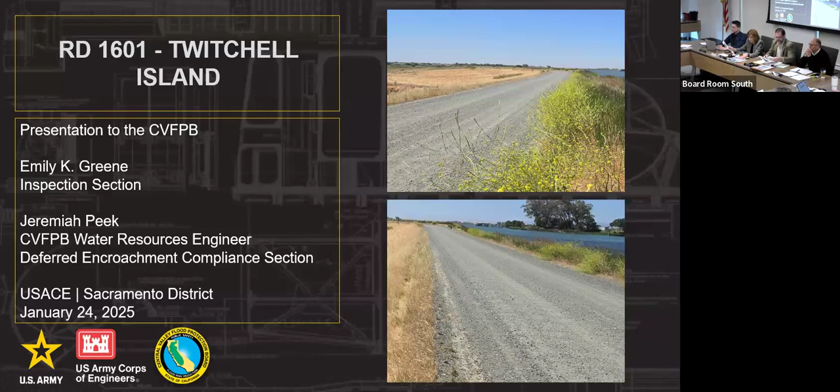Oh, that was the wrong presentation. We're actually going to brief item 8A first, then move on to item 8B. Item 8A on my agenda is the Butte Creek... the Mud Creek levee. That's correct. Did I say that incorrectly? No, it was just the presentation behind you, it was the wrong one. So, oh, I was correct. The slide was off. Thank you. All right, so we'll get started again.

Good morning, everyone. My name is Zubair Dosu, manager of the Deferred Encroachment Compliance section, and today I'm here to help brief one of the inspections we have today, which is the Chico Mud Creek levee system. That will be presented by Emily Greene, Chief of the Corps Inspection Section, Acting Chief of the Corps Inspection Section, and myself. Following this presentation will be item 8B, a presentation on the inspection report for Twitchell Island.

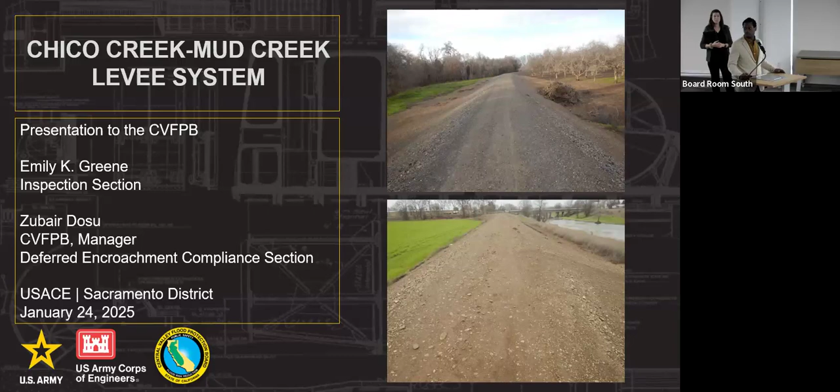That will be presented by Jeremiah Peek from my team and Emily from the Corps as well. We do have LMA representatives and district engineers in attendance with us today. For the Chico Mud Creek levee system, we have Kim Hunter, Deputy Director of the Land Development and the designated floodplain administrator for Butte County Public Works. Her attendance is virtual. In the audience today, we have Elizabeth Ramos, Senior Engineer for KSN, the district engineers for the Chico Mud Creek levee system. They are both welcome to answer questions and give comments as well.

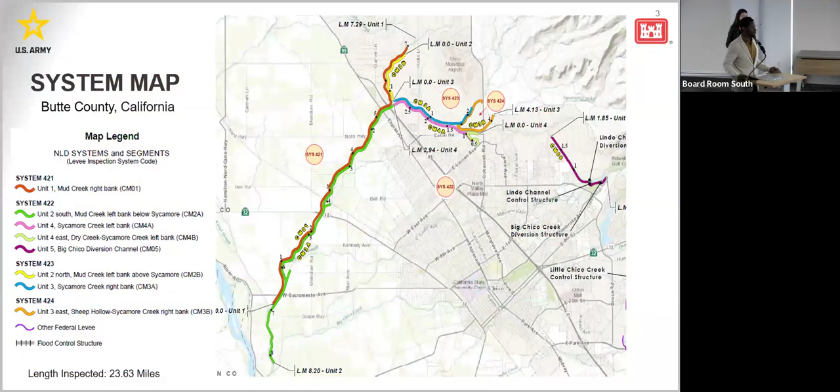Here we have a vicinity map of the Chico Mud Creek levee system. It is located in Butte County, approximately 85 miles northwest of Sacramento. The levee system provides protection for the city of Chico, and it is maintained by Butte County Public Works. Next, I will hand the presentation over to Emily, who will take you in for a closer look at the 4 levee systems and their 8 segments.

Good morning, Ms. Greene. Good morning. Thank you, Zubair, for that introduction. President Dolan, members of the board, happy to be back to talk about the results of our most recent inspections. To elaborate on these systems, from what Zubair showed on the previous slide, there are 4 systems that make up the levees that surround Chico. These are part of the Sacramento River Major and Minor Tributaries Project. The 4 systems are comprised of 8 segments, as defined by this map on the screen, and hold back floodwaters from Big Chico Creek, Sandy Gulch, Sycamore Creek, and Mud Creek. The systems reduce flood risk to the city of Chico and its suburban areas and some agricultural lands.

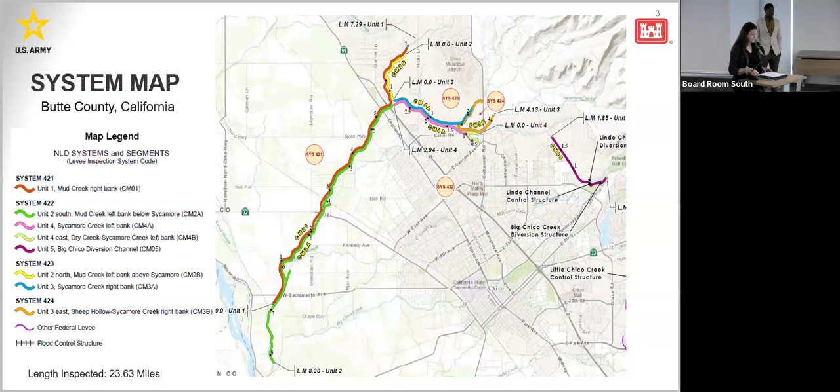Next I'll be showing the system report cards. Again, there are 4 systems, so I'm going to show 4 report cards. The first one here is Unit 3 East system. Overall, this system was determined to be in good condition. There were 0 categories rated unacceptable, meaning no deficiencies were observed that we expect to have a negative impact on project performance. The lowest rated category assigned was minimally acceptable. Based on the inspection results, the system is active in the PL 84-99 rehabilitation program.

Next report card, this is for Unit 1. Two categories were rated unacceptable in this system, including encroachments and animal control. The unacceptable rating means deficiencies were observed in these categories that are expected to have a negative impact on project performance. Based on the inspection results, the system is inactive in the rehabilitation program.

Third report card, this is for the Units 2 North and 3 system. On this system, one category was rated unacceptable, and that was for encroachments. Oh, I'm sorry, I see I wrote just one in my notes, but I see on the report card there's actually two - there's also a U item for depressions and rutting in this system as well. Based on the results of this inspection, the system is also inactive in the program.

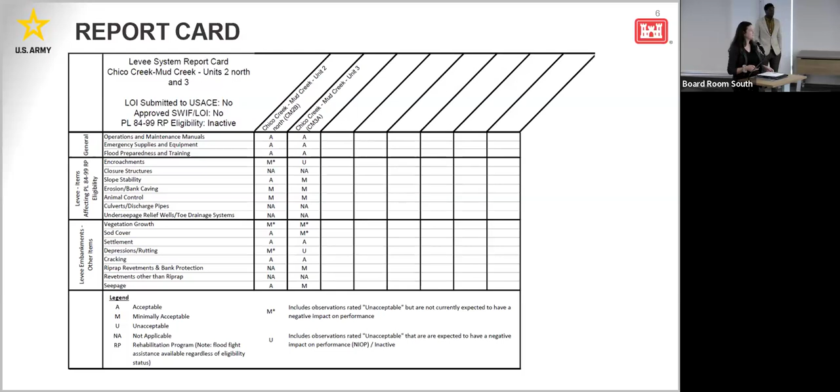Finally, we have the report card for the Units 2 South, 4, and 5 system. This is the largest of the 4 that protects the city of Chico. This system had 5 categories rated unacceptable, including encroachments, erosion bank caving, animal control, settlement, and depressions and rutting. This system is also inactive in the rehab program based on the inspection results.

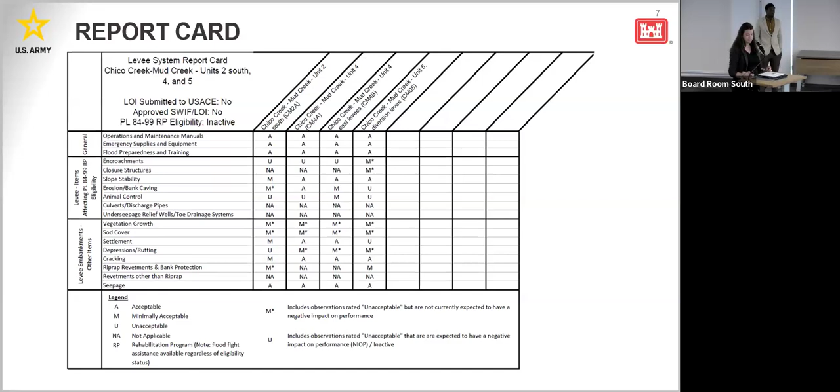So next I'll show a few example observations. I just have one slide and not four, one for each system, because the bulk of the unacceptable deficiencies were related to encroachments and animal control. I feel like this slide really does a good job demonstrating the overall typical conditions of all four systems.

So all of these specific observations were assigned the highest unacceptable rating and are expected to have a negative impact on project performance.

Photo number 1, we're looking at animal burrows on the levee slope with holes measuring about 5 inches in diameter. Burrows were observed on both slopes in this particular area, and this condition was observed to extend for approximately 2 miles.

Photo 2 shows the outlet of a 24-inch culvert that crosses the levee 15 feet below the crown. Some maintenance issues identified included cracking and displacement of the surrounding riprap protection, and sediment was observed partially inhibiting function of that flap gate. Although the largest concern was the results of the video inspection.

A video inspection performed in 2018 resulted in a likelihood of failure rating of 5, which is associated with the highest level of risk.

Photo number 3. This one doesn't look scary, although it is highlighting a potentially very serious concern. There were several areas throughout multiple systems where the levee was measured to be smaller than the as-built indicated they were designed to be. This photo is showing a crown width of 8 feet, whereas the as-built showed the levee was constructed to be about 12 feet.

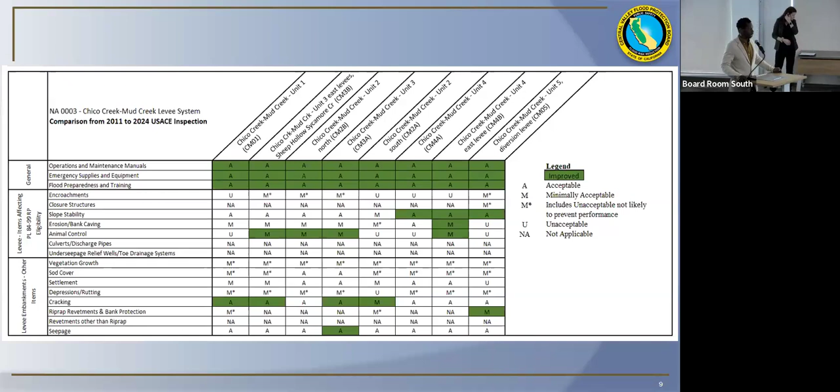The other 3 levee systems are currently inactive, but I am told there is a draft LOI in the works. That draft LOI has not been submitted to the board for review as of now. It's still being drafted, but it's very pleasing to hear that the other 3 levee systems will follow in line to seek eligibility in the PL 84-99 program, so they can receive federal funding in the event of a storm and damage to their levees or flood control works.

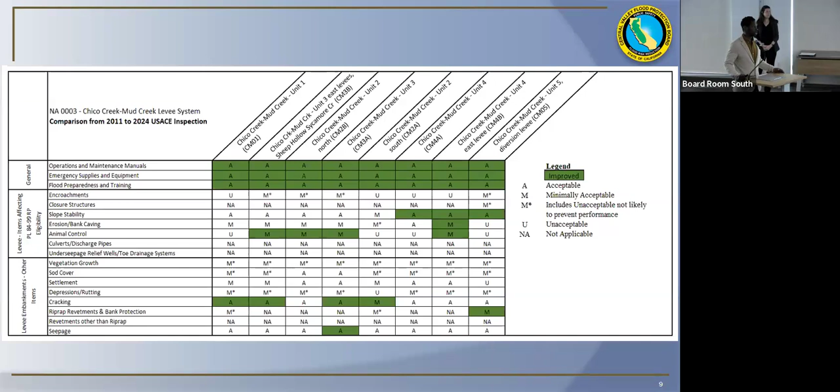So moving on, the other improvements are shown highlighted in green, and those are for improvements to the levee embankment in the last category that you see there.

Board Member Countryman.

Are any urban areas protected by these levees?

I would believe so. The city of Chico, this levee system does provide protection for.

I mean, I'm stunned. I can tell you that this 4 creek system is key for the flood protection for the city of Chico, downtown and the surrounding neighborhoods. So losing 4 feet of the top of your levee protecting urban areas is totally unacceptable.

That is something we're currently investigating, as to why there has been a reduction in the levee. It's quite significant, with 4 feet of the top of that levee missing. But when we do find more information on that, we will provide it to the board.

So this slide here is a photo reflection of the unacceptable items affecting eligibility. In total, there were 24 unacceptable observations. Those observations do have a negative impact on levee performance.

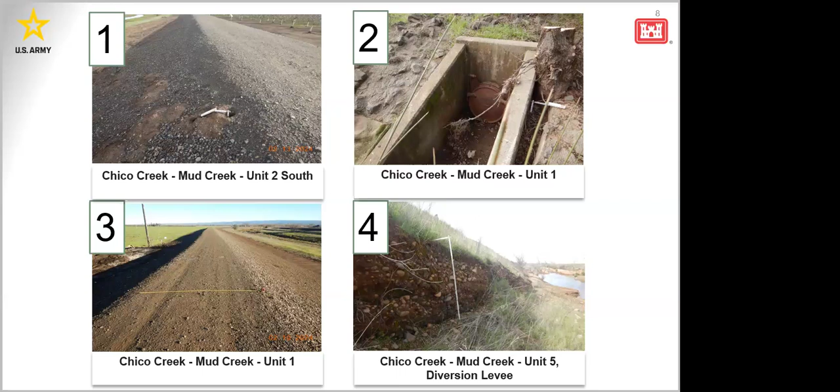Thank you. You're welcome. Thank you. Definitely, thank you. I have some background on that, but it's background and history. Okay, any other comments from board members?

Member Countryman? I have a question for Zubair. Oh, okay.

Couple of questions on this area where the levee's only 8 feet wide. Is it on both sides? That is correct, from both of those images, that was both on the right and left bank of Mud Creek. And what's the length, the extent of it? Emily, do you know the exact? I don't have that information in front of me, but it is documented in the report, so we can provide that information to board staff and they can pass that along. But it's not 100 feet, it's 1,000 feet, or? Yeah, I'm just trying to get an idea of the significant length, the magnitude. Okay, so about the whole segment is what I'm hearing, so the report documents that.

So I'll just make a comment here as an engineer that's worked on many levees. The levee was not reduced in size because of dragging. That's beyond any possible comprehension that that could be true. It sounds like this may actually be a Corps project that would be needed here, because the funding to do it all by yourself is not there. So I think part of the things that the local people should be looking at is a Corps project to bring that up to where it was never constructed in the first place. It was supposed to be constructed to 12 feet, and it wasn't. It was constructed to 8 feet for some reason. And a Corps project may be necessary to bring it up to the 12-foot width.

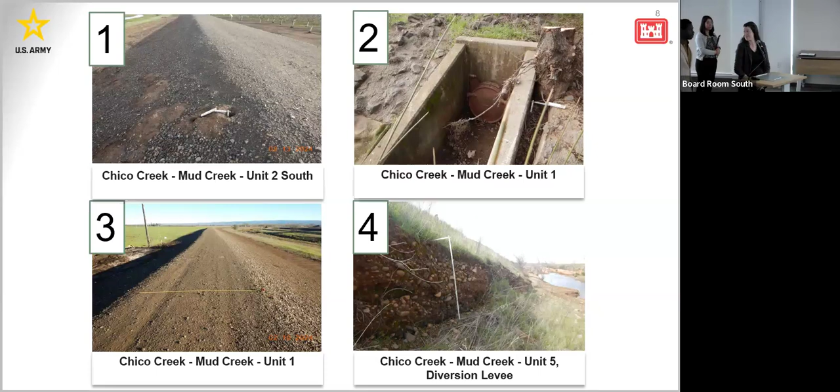You got a summation, or are you moving on to the next one? Yeah, so we didn't really finish this slide, but we'll carry on where we left off.

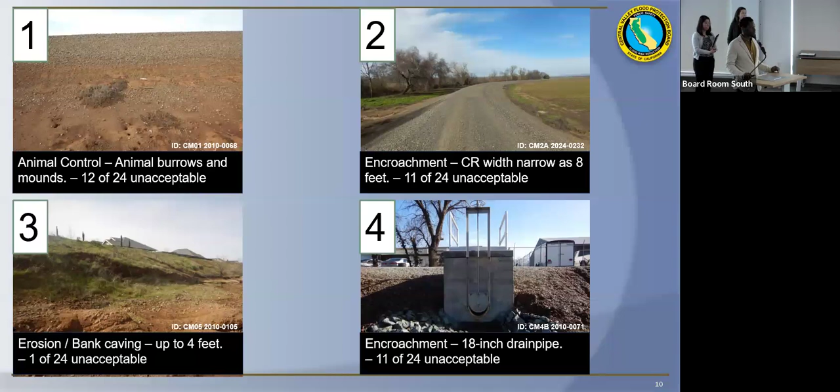Any further questions, board members? Audience? Online? All right, we did our questions before we allowed you to sum up. So thank you, everyone.

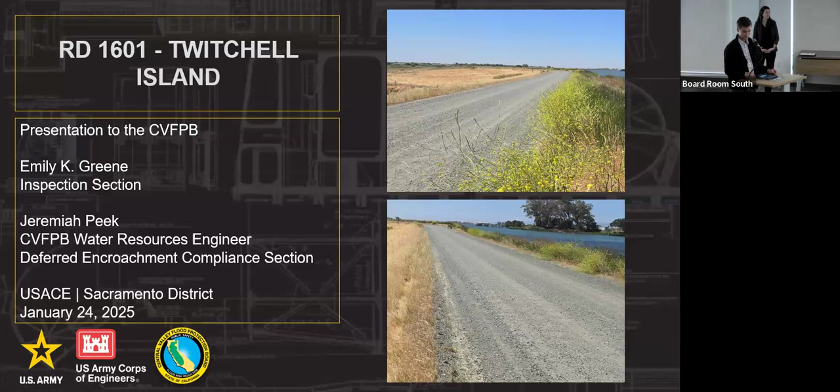Today we're looking at Reclamation District 1601, Twitchell Island. Twitchell Island is located about 30 miles to the southwest of Sacramento. This levee system protects the western side of Twitchell Island. The other sides of Twitchell Island are protected by non-federal levees. Next up, Emily has a more detailed view of the district.

Thank you, Jeremiah. This levee system is part of the Sacramento River Flood Control Project. As Jeremiah said, the system is made up of 3 levee segments, although only one of those is federally authorized and under your board's jurisdiction, that's the segment along 3 Mile Slough that borders Twitchell Island to the west, shown as the purple line on the map. This system reduces flood risk to the agricultural lands of Sacramento County.

So here's the report card for the system. Overall, the system was determined to be in good condition, with 0 categories rated unacceptable. In other words, there were no deficiencies observed that we expect to have a negative impact on project performance. The lowest rated category was assigned a minimally acceptable rating. Based on the inspection results, this system will remain active in the PL 84-99 program.

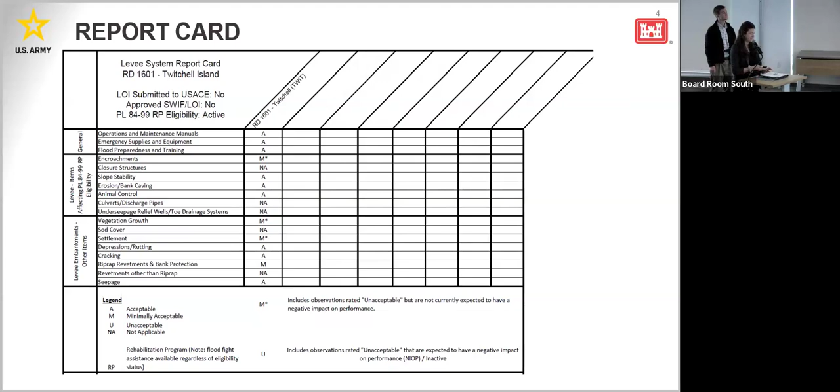Next I'll show a few example observations. As mentioned, there were no overall categories rated unacceptable. However, there were some individual observations rated unacceptable because action is required of the sponsor LMA to address a concern, though there is overall less risk associated with these individual observations. The following individual items received a minimally acceptable or unacceptable rating.

Starting with photo number 1, this shows an area where vegetation was overgrown on the waterside slope, which inhibited the inspector's ability to fully inspect the levee. Things such as animal burrows and cracks can be hidden by this condition.

Photo 2 shows an 8-inch steel pipe through the levee, visible on both slopes; we're looking at the water side in this photo. During the inspection, it was observed the siphon breaker was broken, although the LMA has since reported to USACE that it has been fixed and is now operational. This pipe is also permitted. The specific concern we had with this pipe is that no video inspection or pressure test has been performed, so the condition of the buried portion of the pipe is unknown.

Photo 3 is a little hard to see, but what we're trying to show is a 6 to 12-inch dip in the levee crown that extends for about 150 feet. If you look right behind the car in the photo, you can most clearly see that dip. Not a significant depression, but the cause was unclear, so we recommended it be investigated in case something like settlement is occurring, and the levee crest height needs to be restored to its design height.

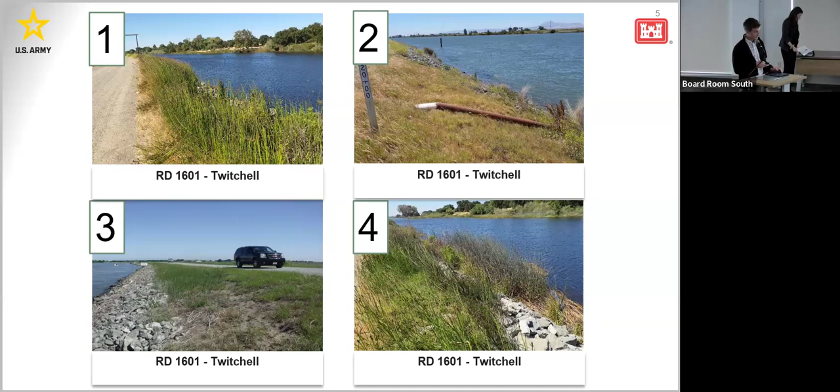So I had some details of the report card. As you can see, the system since the last inspection in 2014 has improved in several areas: flood preparedness and training, slope stability, erosion bank caving, and depressions and rutting have all improved since the last inspection, and they're all acceptable at this point.

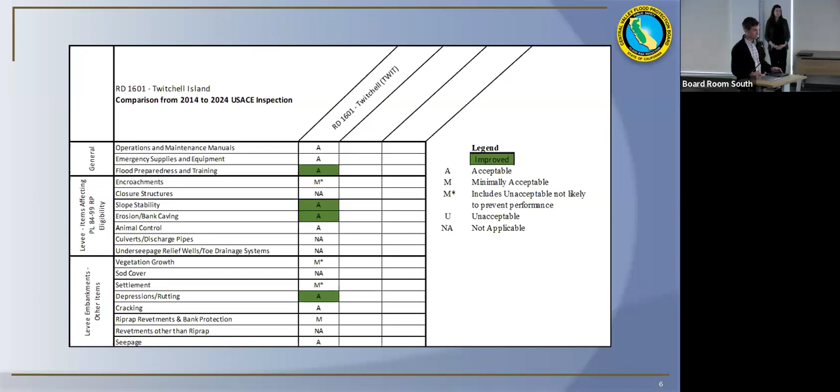Yes, thank you guys. The system, like we said at the very beginning, is active in the PL 84-99 program through inspection.

I have 4 more photos of the issues. Usually they would be things preventing the system from being eligible in PL 84-99. In this case, they're just items that were marked by the Corps during their inspection.

Number 1 is vegetation growth. Like we talked about before, the vegetation growth has been addressed since this inspection, which was May of last year. I heard that recently the levees had been grazed using sheep. Is that right? Yes. So in the Corps report, 3 of the 9 unacceptable items were vegetation growth.

Number 2 is another instance of settlement. There were 2 instances of settlement. This is the other one from the one that Emily showed us a picture of. It has the same depth, but this one is 200 feet instead of 150.

Picture number 3 is that piezometer well that Chris had mentioned. So 4 of the 9 unacceptable items were encroachments, and this is one of them. It sounds like it is planned to be removed at some point in time.

And then the last image there is of 2 metal siphon irrigation pipes, a 12-inch and a 14-inch one. One of them has an ABO permit. Both of them need a video inspection, and they both have positive closure devices, but they are on the land side instead of the water side for these particular pipes.

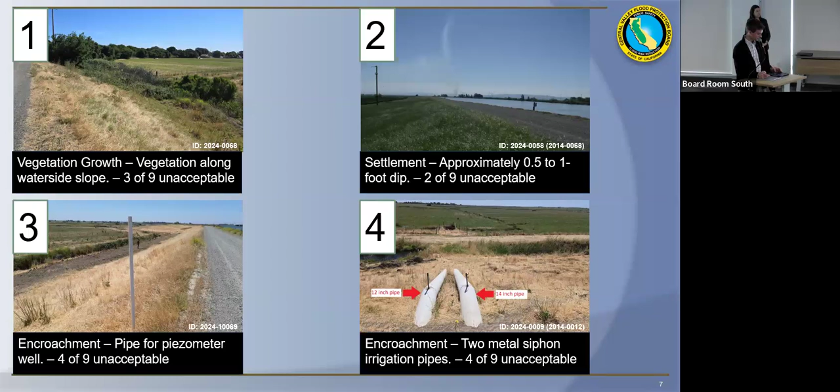And that is what I have. Did you guys have any questions for me?

We also have. All right, that's the summation.

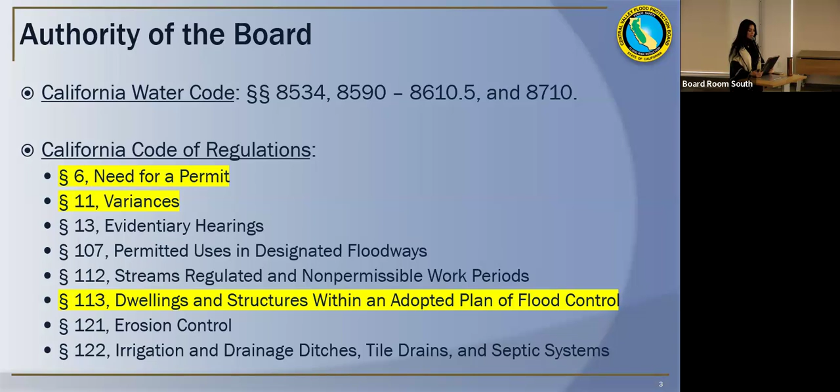I will be providing project information, analysis, and staff recommendation first. Eric and Jennifer Krienert are attending remotely and can answer any questions the board may have related to the variance request.

This vicinity map shows where the project is located on Long Island and its relative location to the surrounding 2 federal levees. The island consists of approximately 32 legal land parcels. Note that Grand Island Road also runs through the length of Long Island and connects to Grand Island by way of a bridge shown on the right. And the Sacramento River is the only stream that contributes to the flood flows at this location.

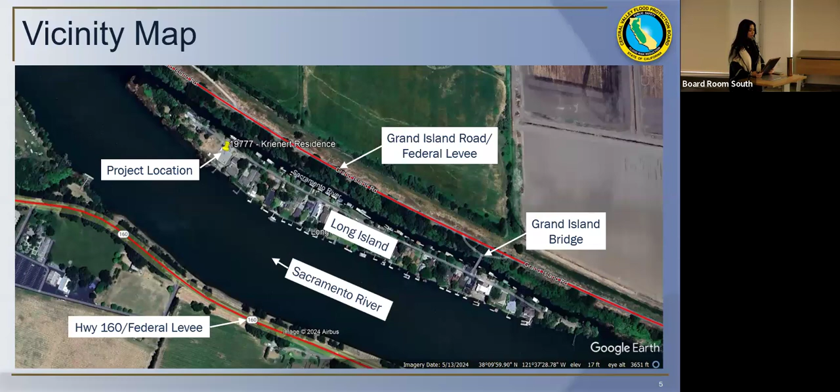So this site map shows the existing conditions at the project location. The project site is on an approximate 1/3 acre property, defined on the northeast by a narrow dredge cut along the river levee and by the Sacramento River on the southwest. The project proposes to construct a new dwelling with a septic system at the rear of the property and a propane tank at the front end. Note that the project activities are outside of the theoretical levee prisms and shall have no impact to the levees. The nearest levee is over 150 feet away.

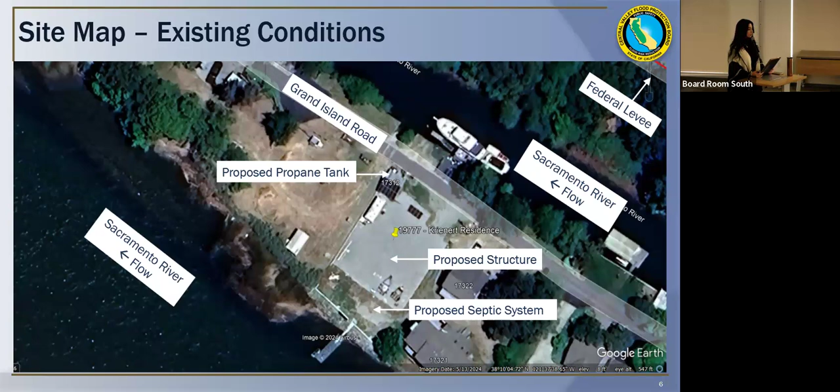Now for staff's analysis of the existing conditions at the site.

The current ground surface is reasonably flat with an elevation of approximately 10 feet. The design water surface elevation for this channel is 13.16 feet. There is a light metal frame carport and a shed-like structure with a corrugated metal roof on the northerly portion of the property, which is to be removed with this project.

As previously mentioned, there are levees near the project on the north and south, right and left banks, and the project is outside the levee section on either side. The board is the non-federal sponsor regulating encroachments along this federal channel, to ensure the design flow of 35,900 cubic feet per second is not impacted.

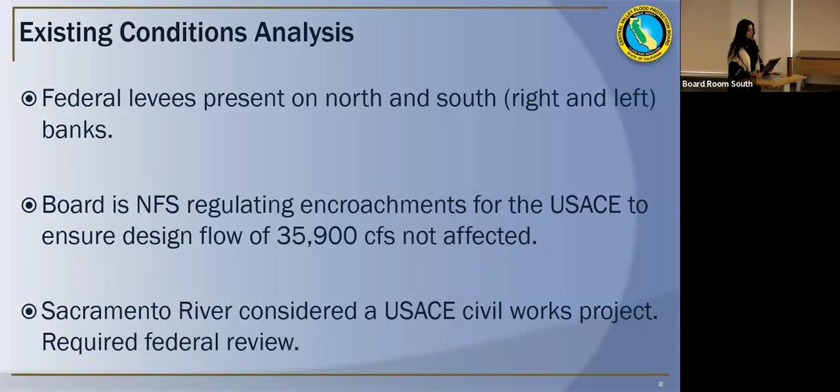This project has undergone a federal review.

The site plan shows the proposed conditions. Here you can see the proposed dwelling with the 1,500 gallon concrete septic system at the rear of the property and the propane tank at the front end.

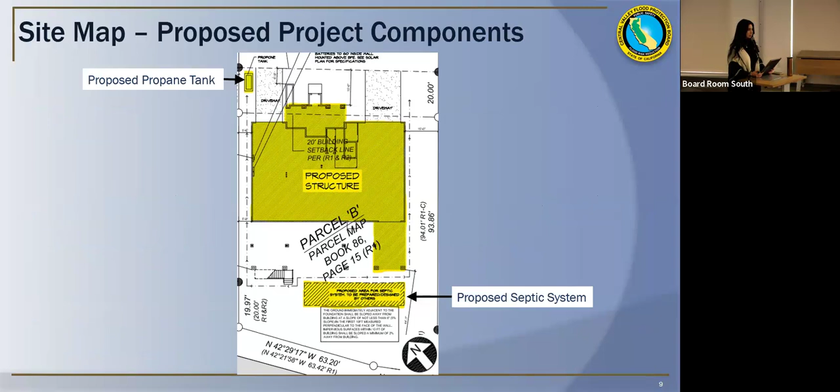Moving on to the staff's analysis of the proposed conditions at the site. The dwelling consists of slab-on-ground garages overlain by a second-level living area. First level is to be uninhabited, and there will be no excavation into the native soil. Rather, the dwelling elevation will be raised by a foot with an aggregate base fill and another foot for the foundation.

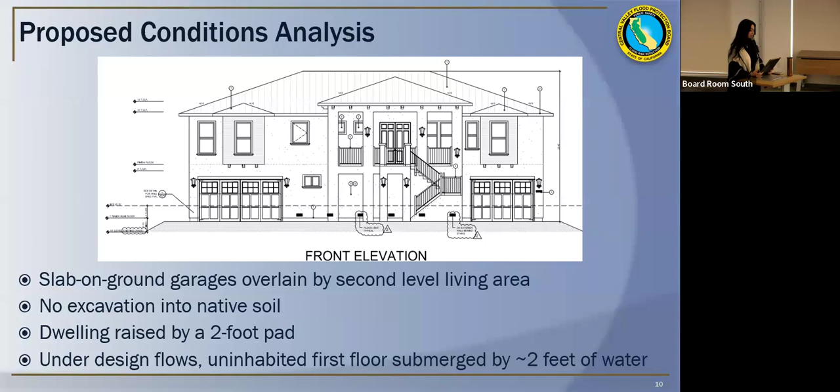The foundation will feature a concrete masonry unit wall at the base, enhancing stability and flood resistance. Under design flow conditions, the first floor can expect to be submerged by a little over 2 feet of water, with the second floor 8 feet above the design water surface elevation. The structure has been designed to withstand these conditions and is properly anchored to prevent flotation.

To give you a better understanding of the elevations, we have a cross-section showing the dwelling with relation to the federal levee on the right. The red line shows the typical water surface in the Sacramento River and accompanying side channel, as well as the ground elevation post-project. The dotted blue line represents the design water surface elevation of 13.16 feet.

Highlighted in yellow shows the garage slab or base elevation of 11 feet. The highlighted pink shows the inhabited second level elevation, which is 8 feet above the design water surface. And the green highlight points to where 1 foot of AB fill will be placed, and above that is another foot of foundation, making up the garage slab. 2 feet total.

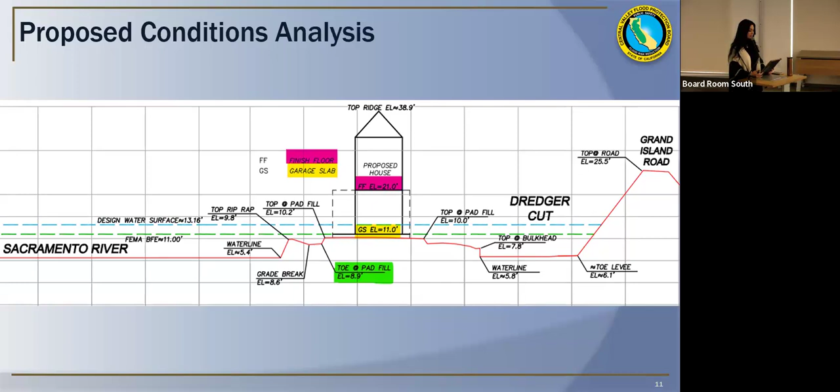Now, the Kreinarts are seeking to utilize the dwelling in an adopted plan of flood control for year-round occupancy as a residence, which does not comply with Title 23 standards. Therefore, a variance request was submitted for the design, which will be discussed later.

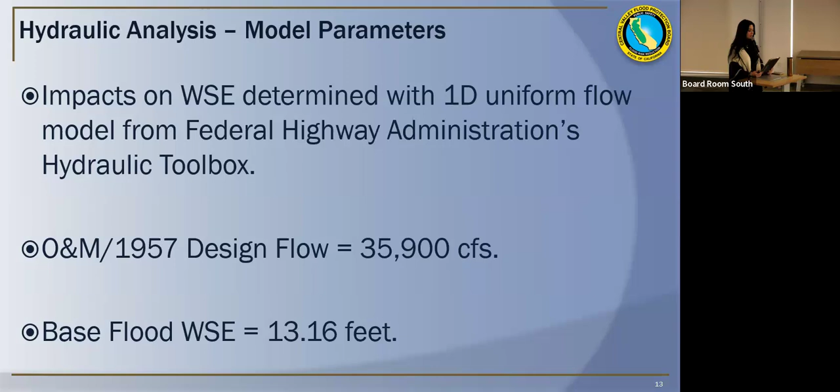To analyze the hydraulic impacts on the adopted plan of flood control, a 1D uniform flow model was developed. The model utilized the O&M and 1957 design flow of 35,900 CFS and a base flood elevation of 13.16 feet. The hydraulic model parameters and results were presented in a letter prepared by Balance Hydrologics and are shown on this slide. The resulting water surface elevation due to the blockage is 13.26 feet, which indicates a 0.1 foot rise.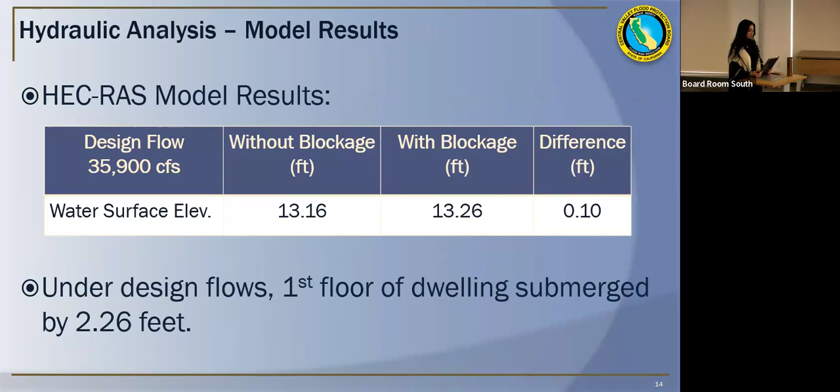Note that under design flows, the first floor of the dwelling will be submerged by 2 and a quarter feet of water, which is why the first floor is not inhabited. Lastly, no significant impacts on velocity, scour, or flood risk were found.

Board staff's conclusions of the hydraulic analysis are as follows. Overall, the project results in insignificant hydraulic impact with a rise of 0.1 feet in water surface elevation, and the United States Army Corps of Engineers issued a letter of permission on this project.

The proposed dwelling is located within the federal channel but outside both levee sections with no excavation taking place. Therefore, no potential adverse impacts to the levees are expected. And since the project is a sufficient distance from the levees, a geotechnical investigation was not required.

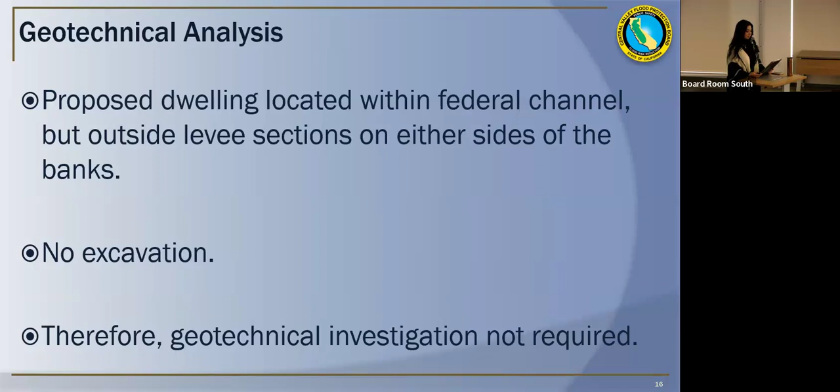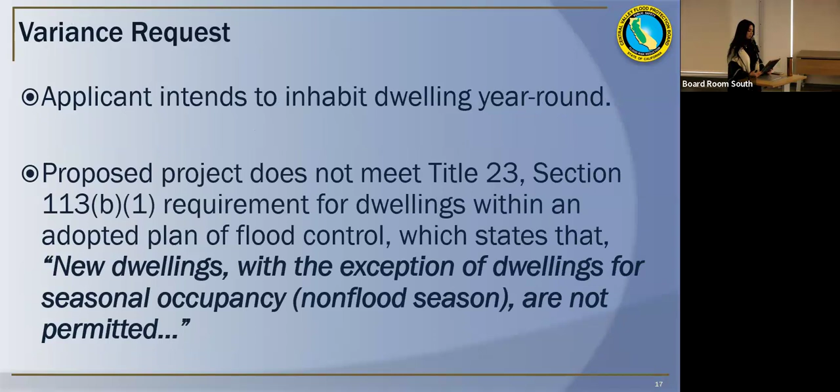The Kreinarts intend to inhabit the dwelling year-round as permanent residents. This does not meet the Title 23, Section 113B1 standard for dwellings within an adopted plan of flood control, which states that, quote, new dwellings, with the exception of dwellings for seasonal occupancy, non-flood season, are not permitted, end quote. A variance is required for this reason.

Board staff's analysis of the variance request includes the following. The standard is intended to prevent loss of life and property and ensures developments do not aggravate flood conditions or impact flood control facilities.

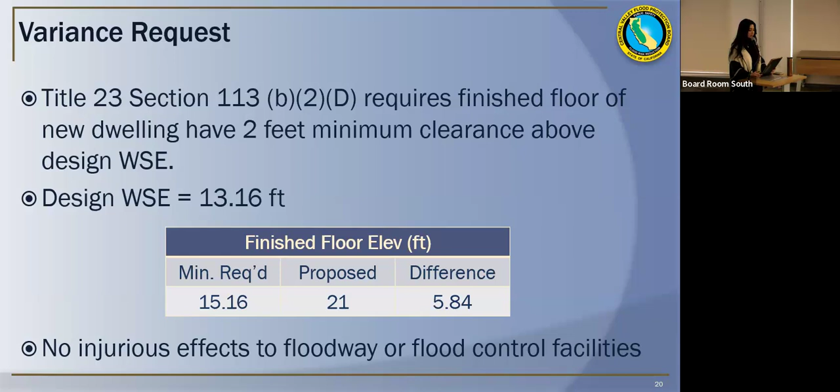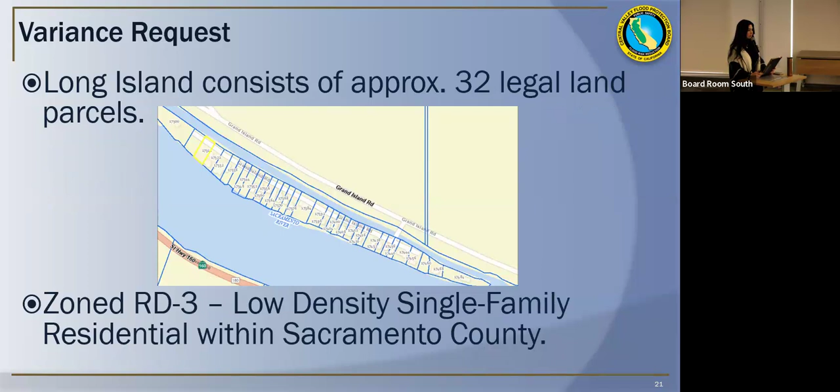The island consists of 32 parcels, all zoned RD3, low density, single family residential, according to Sacramento County's general map viewer. Board staff identified 15 permits for dwellings on Long Island that were issued between 1949 and 1984, listed here.

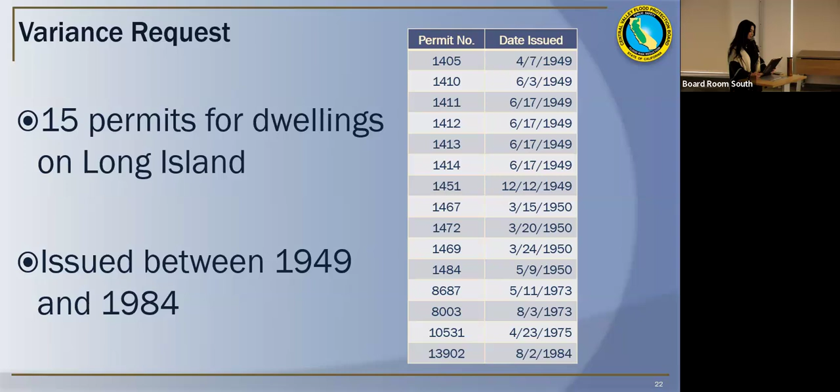The following is board staff's recommendation on the variance request. Staff agrees that occupancy during the flood season increases the risk of loss of life, but because the Kreinarts will implement an emergency evacuation plan, this risk is reduced. Again, this plan will be reviewed and approved by board staff, included as a permit condition, and implemented prior to occupancy. Furthermore, the flood-proof dwelling design improves structural integrity.

USACE review did not object to the project. Therefore, from a flood control perspective, with the evacuation plan in place, board staff recommends the board approve the variance and permit.

More information regarding U.S. Army Corps' review is as follows. The Corps conducted their federal review on the impacts of the new dwelling with septic system, and determined that post-project conditions would not be injurious to the public interest and will not impair the usefulness of the project works. Their review culminated with a letter of permission that will be incorporated into the issued permit.

Board environmental staff has determined that the project is exempt from CEQA.

Based on staff's analysis of the proposed project, it is recommended that the board take the following actions: adopt the CEQA findings, approve the variance to board standard 113B1 and the permit as provided in the staff report, and direct the executive officer to file a notice of exemption with the state clearinghouse.

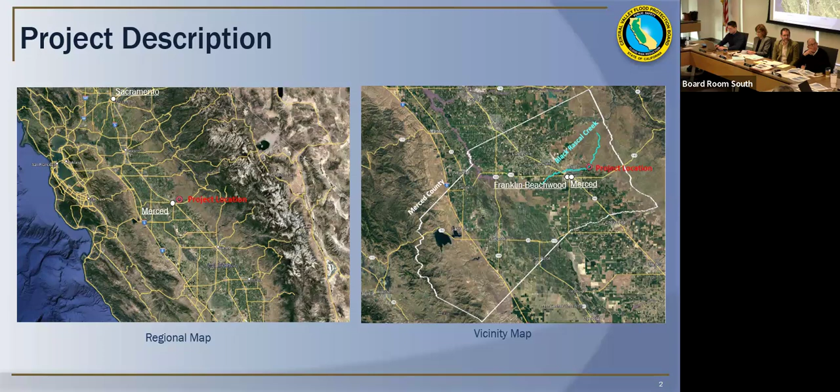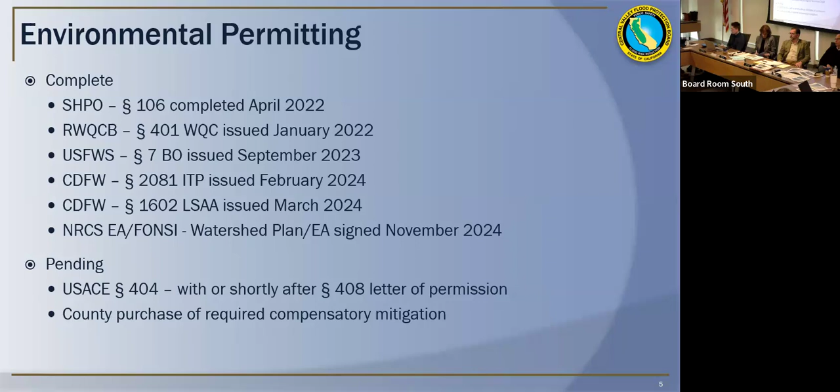Relating to design, based on staff's review of the design and the real estate, the project is unique in that it can both pass floodwaters and attenuate flood flows during extreme events. In that respect, it can function and be viewed as either a levee or a dam.

When designing the project, the County of Merced contacted the Division of Safety of Dams, DWR's Division of Safety of Dams, and reviewed the project and found it not to be a dam because no barrier exists to impound water since the principal spillway is ungated and at grade with the channel.

The Army Corps has reviewed the project and views it as a dam according to dam safety regulations due to its impounding capacity, consistent with Engineering Regulation 1110-2-1156. In addition, the Natural Resources Conservation Service, which is partially funding the project, requires the project to meet certain dam safety requirements based on the designation of the dam, either an extremely high hazard or high hazard dam.

So in terms of reviewing the design and applying the standards from the board staff's perspective for Title 23 for the hydraulic and geotechnical analyses, board staff is considering the project as a levee system consistent with the DSOD's determination.

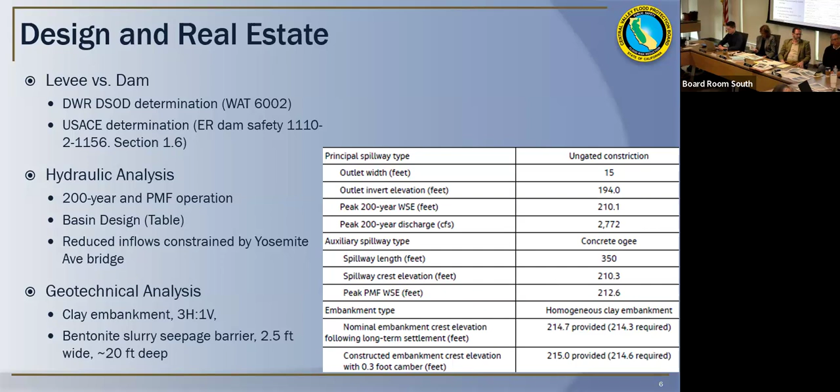So even though the embankments and spillways were designed to safely pass the PMF without failure, the detention basin was designed specifically to detain the 200-year flood.

Larger floods would exceed the design capacity of the basin and spill over land. However, rather than spilling into the city of Merced, and to the southwest and across East Yosemite Avenue to the south, as would occur without the project, it directs flows only southward where they attenuate in agricultural fields.

The project does not enhance the existing Black Rascal Creek diversion channel or its levees downstream. Therefore, there is still a residual risk if the diversion channels were to fail at the design capacity of 3,000 CFS, or if the maintenance was neglected.

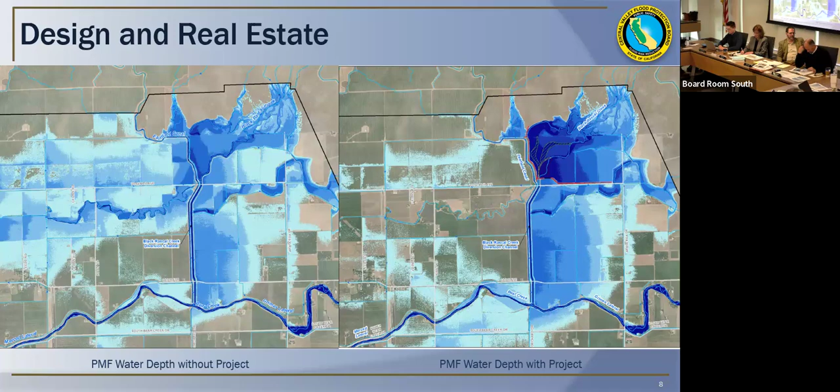The risk assessment was a key part of designing the project. The applicant conducted a life loss analysis with LifeSim modeling results if the system were to fail. A semi-quantitative risk assessment and potential failure mode analysis were conducted with a workshop and report that found all risks fall within the as-low-as-reasonably-practicable range with the incorporation of the report's recommendations. Currently, the Army Corps Risk Management Center, or RMC, is reviewing the project for any induced flood risk caused by the project and is preparing a memo with its findings.

The key point in bringing this project to the board today is the fact that the Safety Assurance Review Panel has provided final comments on the project, which primarily focus on hydraulic connectivity and properties of fill material and backfill material, but nothing major was identified. So we feel it's a key step, bringing this project back to the board for discussion after reaching that major milestone.

Would you say again the name of the review panel? The Safety Assurance Review Panel. Okay, thank you.

Into property acquisitions, the County of Merced initially acquired the project's footprint property, as well as a 15-foot landside buffer and waterside buffer for a levee vegetation-free zone. Once the Army Corps defined the project as a dam, an additional area up to 50 feet was required around the toes of the embankments.

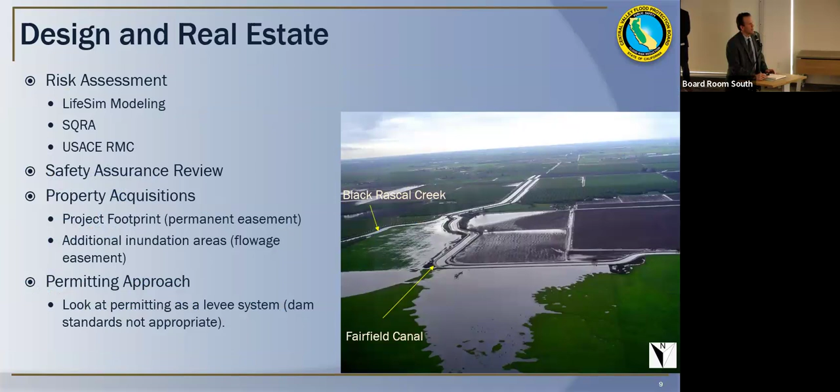This picture right here I think is just a general flooding condition for a normal event. I would have to ask if this is what you're talking about. No, talking about the houses that were flooded, the ones that had water up to the door.

I'm curious, was it a failure of the levee? Was it overtopping? Was it bad drainage? Because in rural communities like this, I mean I live in a rural community like that, a lot of times it's bad drainage. So I was curious how that water got there. I'm going to have to ask our representatives from the county of Merced to come up and speak to that.

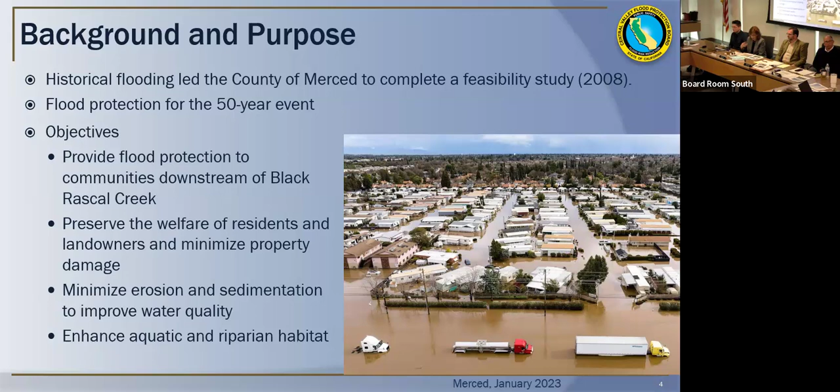I have a couple questions. I think this one's for the county person. Is this area around this project, the uses appear in some instances to be pretty intensive agriculture with orchards and others are low impact. Is this in any way zoned for urbanization? What's the land use plan for the county around this?

Nathan Bray, Director of Public Works from Merced County. This is generally in an agriculturally zoned area. The city of Merced is, for the most part, west and southwest of this area. I do not believe the city's sphere of influence encroaches near this project area. And the county's general plan is generally ag zoning out here in this area right now.

From my perspective of what's occurred in my county, where you have ag and then develop systems for that and then the urbanization comes in, the danger comes with it. So I think that's something to include. So the design here is what's to be - this basin doesn't presently exist. This is part of the design project. Is that correct?

So the area outlined in red doesn't exist right now. That's just the project footprint that is being proposed. What does exist are the state plan flood control levees along the left side of the screen and through the middle - those two levees there that collect water into that yellow area, that exists. That's the current situation right now. Okay.

Okay, I think my confusion was, I thought I heard you say that the Army Corps federal levees were red. So there's a lot of red there. That seemed a little too rectangular to be federal levees. I'd say sanguine would be a better description. Okay.

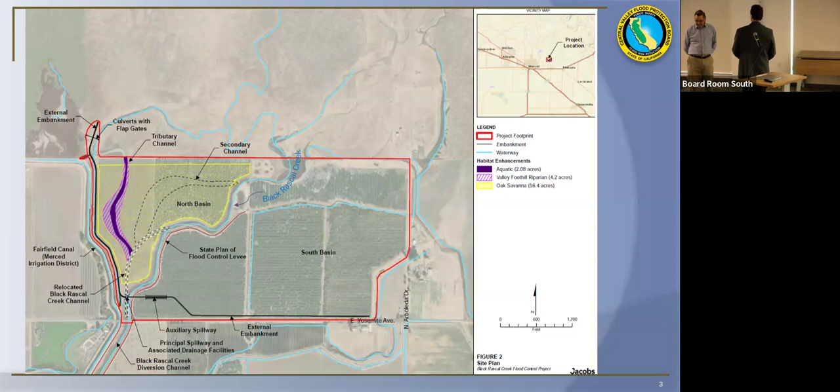Does anyone in the audience want to make any public comment or ask a question regarding this item? Informational briefing regarding Black Rascal Creek Flood Project 2B. I don't see any hands raised. No? Okay, then we can move on.

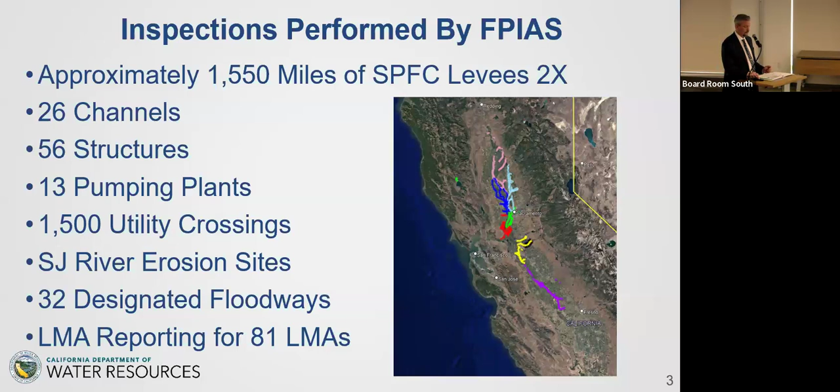In the past, whenever we accomplish these inspections, we would provide a report and give a presentation to the board. And at the request of the board, we've combined all of these reports into this one annual report. So over the years, we've made additions and changes to those reports. It's grown - it's at 600 plus pages now.

So we've added a designated floodway section, an encroachment section, and a utility crossing inspection section.

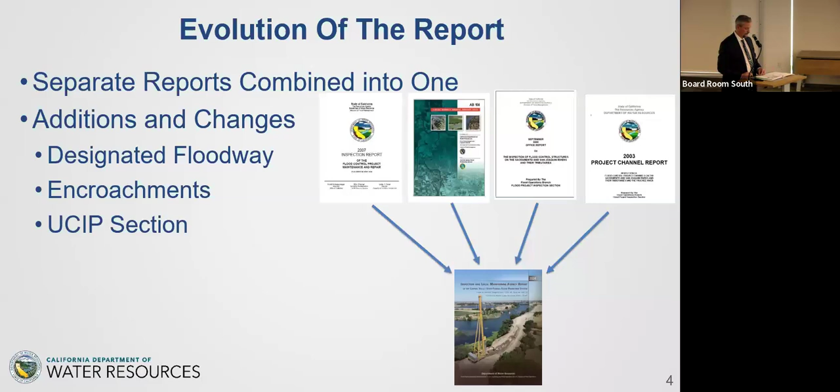This year, there's some changes, and you'll notice that. I think we've been talking about it, at least with the LMAs, and you've heard about it from us the last couple years, or at least last year. So, you'll notice that the number of LMAs has changed from 106 to 102, and that's just because a couple of the LMAs have consolidated.

And of particular importance to this year's report is the inclusion of the LMA responsible pipes in the overall ratings for each LMA. So in the past, pipes were inspected and rated, but they weren't included in the overall rating assessment of each LMA. They were considered encroachments.

We first proposed to include those back in 2015 - the LMA responsible pipes, the system features. We wanted to include those as part of this inspection. We've been talking about that since 2015. For various reasons over the years, that wasn't done.

But along the way, we've been keeping the LMAs informed of which pipes are considered LMA responsible. And we've given them the opportunity to come discuss with us their thoughts on those or any concerns on individual pipes.

So the impact of those changes, they'll be seen in the results. So you're going to see that in this year's levee ratings. And there's more LMAs receiving minimally acceptable ratings than in previous years as a result. And that's, when you see that, it's likely a result of the inclusion of one or more unacceptably rated LMA responsible pipes in those LMAs. And we'll talk more about that.

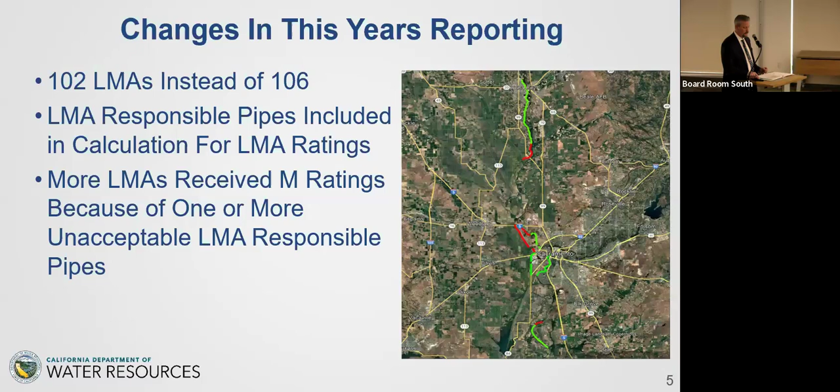So I've covered that background. Today what we're going to be doing is I'll continue on by providing an overview of the contents of that report - what's in there. I'll get more specific about the LMA summary profiles, which are the appendices - that's sort of where the details are. And then I'll review the encroachment section and present the results of this year's inspections.

At that point, I'll turn it over to Mike Tao. He'll be talking about the LMA reporting results and the results of the utility crossing inspection program. And I'll come back to the podium and finish up with a discussion of some of our other section activities.

So the inspection report contains the maintenance inspection results for the levees, channels, structures, and designated floodways. It also has the results of DWR's San Joaquin River Erosion Survey, the LMA annual reporting results, and the results of the Utility Crossing Inspection Program, known as UCIP.

Some of the other programs that are included in the report are DWR's Flood System Repair Project, the U.S. Army Corps' Sacramento River Bank Erosion Survey, and the Corps' PL 84-99 eligibility. And all that information together, provided by those programs, really helps the inspection unit determine the quality of the maintenance that the levee maintaining agencies are performing. And then the report concludes with the flood project inspection and assessment section activities and accomplishments throughout the last year, as well as summary profiles located in the appendices.

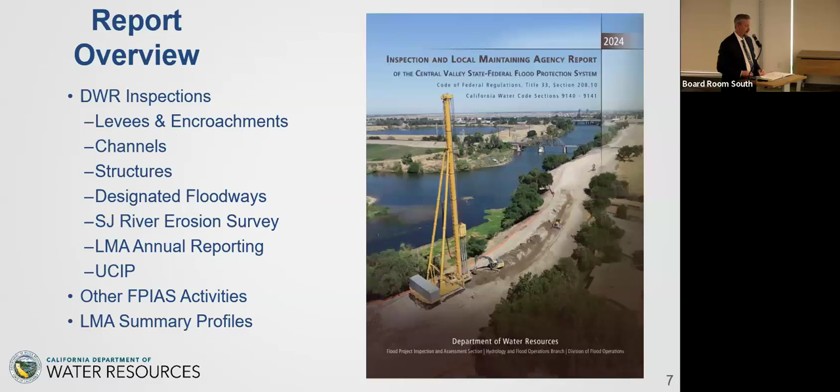So the front end of the report is really the highlights. It's short compared to the thickness of that report. That's the wrap up, the core, the details, the important stuff is in those appendices A, B, and C, and those are the LMA summary profiles. Those summary profiles provide basically a one-stop shop for the LMAs to get all that data that we've gathered and put in that one place for your review.

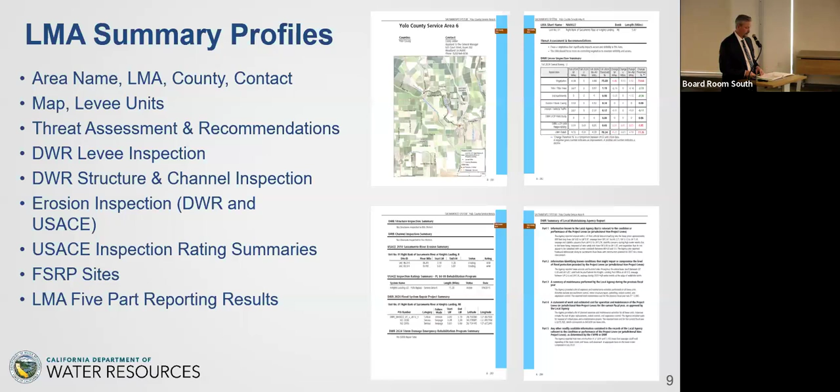Those LMA summary profiles, you'll notice the format's the same every year, just the data gets updated. The LMA's overall maintenance ratings are found in these summary profiles. The data in these profiles includes the LMA contact information, results from structures, channels, inspections, and the DWR and Corps erosion surveys. The combination of these results gives us the ability to assess the levee threats and give recommendations on how the LMAs can improve their maintenance. And that section also includes the LMA reporting results, and it provides a summary of each of the 5 parts that they report in that LMA requirement. Mike Tao will cover that later in the presentation.

Before we move on to the results, I want to talk a little bit more about encroachments that are out there.

There are over 4,300 non-compliant encroachments identified in the levee inspections. They're broken down into 2 different types: a maintenance or an enforcement issue. The maintenance issues are for the most part encroachments that can be managed by the LMAs. Their maintenance programs usually take care of these things, and they're for system pipes, down trees, vegetation, trash, and debris, that kind of stuff. Enforcement issues are encroachments that are typically privately owned, and those are pipes, fences, pruning piles, and landscaping. We only include the maintenance type issues in the overall ratings for the LMAs.

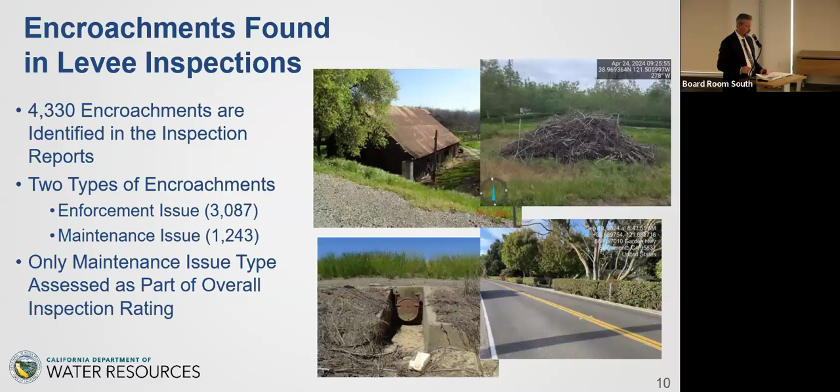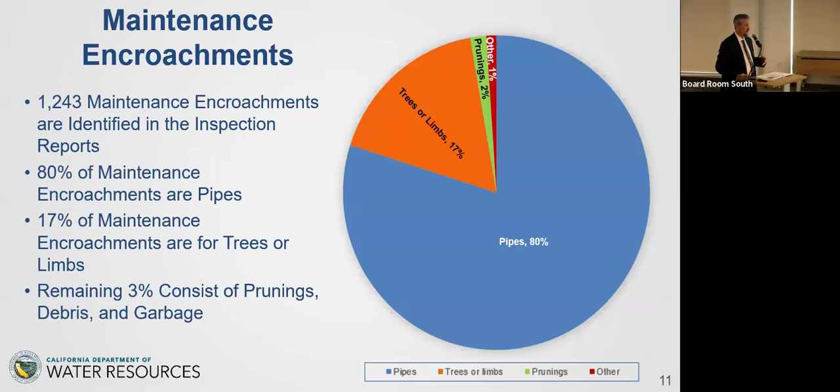Taking a closer look at the encroachments, there are over 1,200 maintenance issues that we've identified out there that are encroachments. As you can see on the slide, more than 3/4 of them are pipes. The rest are for things that the LMAs can take care of with their normal maintenance stuff, vegetation or debris, that kind of stuff.

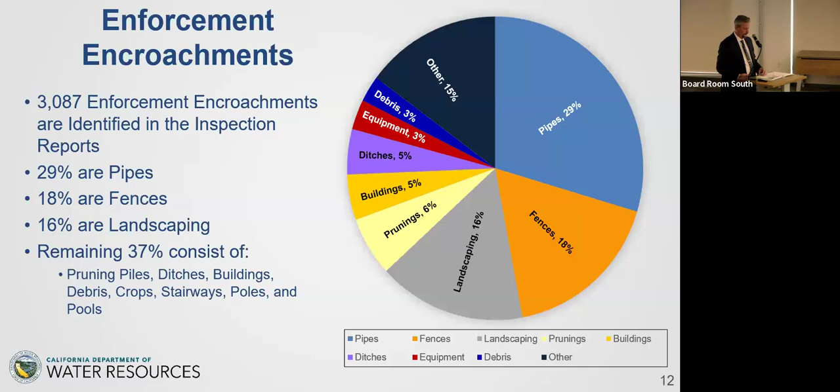When we look at the enforcement encroachments, there are approximately 1,800 more enforcement encroachments than maintenance encroachments. Here we can see that 29% of those enforcement type encroachments are pipes, 18% are fences, 16% are landscaping, and the rest are privately owned items, which include pruning piles, ditches, buildings, crops, and other items. The LMAs are the first line of defense for this sort of stuff, but oftentimes they're not able to deal with this without the board's enforcement section's assistance.

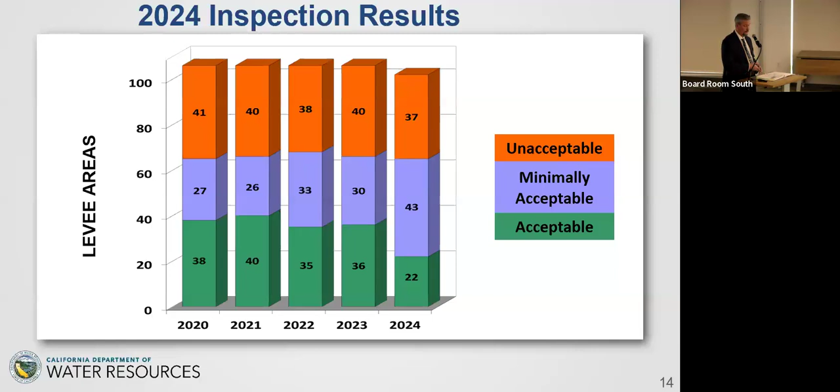Inspection items affecting ratings can be seen here. These are issues like pipes, crown surface road issues, erosion, burrows from animal activities, trees, and vegetation. Like previous years, vegetation is the main deficiency driving those ratings. This year's results show that 20 of the 37 levees receiving unacceptable ratings could have received an acceptable rating had they improved their vegetation management.

Could you describe what is the vegetation that's a problem? Are you including trees? Because I can introduce you to some folks who like trees. But what's the vegetation that's the issue? Weeds? Weeds, grass, untrimmed levee slopes. A lot of times when we get out there, the vegetation hasn't been managed.

It depends. I think there are areas that are difficult to manage for various reasons, but sometimes it's the timing of our inspection. We'll get out there before the LMAs have had a chance to do that. We do our very best to coordinate with the LMAs to get out there when they've done their maintenance.

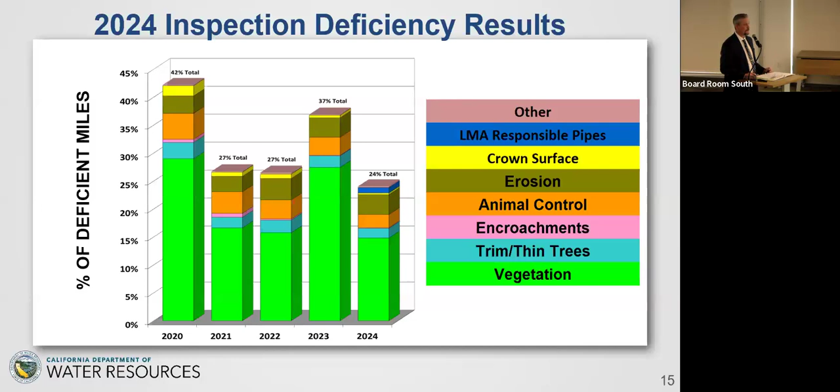All right, thank you. Moving on to channel results. The 26 channels we report on are non-leveed project channels specifically called out in the water code and the Corps O&M manuals. Our inspectors evaluate the channels at specific locations where there are restrictions to the channel, typically places like bridges or road crossings. Vegetation, debris, erosion, and other factors that impact the capacity of the channel are used in the rating analysis for each channel. The main issue driving channel ratings is vegetation.

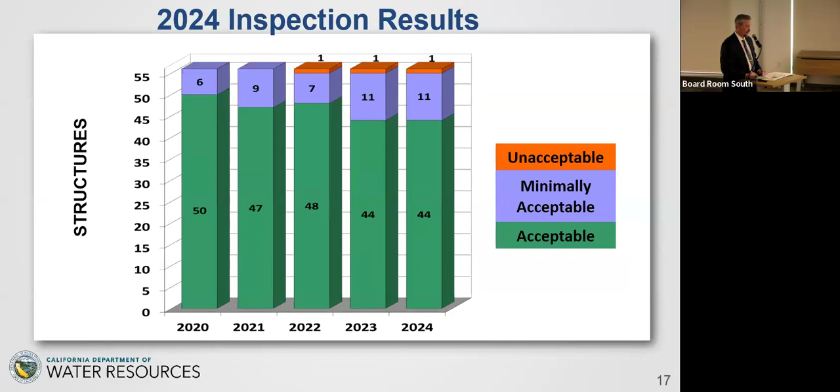Next, we have the results for the structures, and these are typically for things like weirs, diversions, outfalls, and drop structures. The structure maintenance ratings remain the same as last year. Vandalism, concrete deterioration, and vegetation led to the 11 minimally acceptable ratings, and 1 unacceptable structure of the last 3 years is due to erosion around the head wall and a deteriorating pipe.

So an LMA, doing the best that they can, gets the ding for vandalism.

Yeah, no, I get it. It's just hard to swallow.

Our inspectors also perform inspection on 32 designated floodways within the Sacramento and San Joaquin drainage basins, and we do that on behalf of the Central Valley Flood Protection Board. Inspectors use the latest aerial imagery from Google Earth to identify encroachments that may impact the capacity of the floodway or require a board encroachment permit.

Using the updated aerial imagery for 2024, there were just over 1,400 encroachments identified and added to the database this year. The increase in the encroachments was largely attributed to the completion of the initial inspection of the St. Johns River designated floodway in the Visalia area.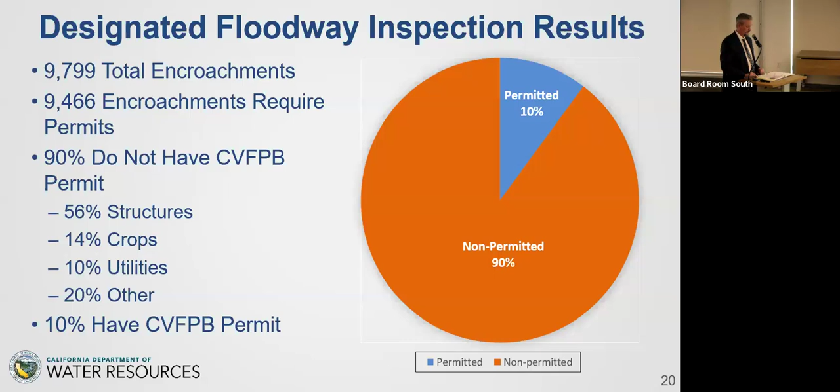Thank you. I know there's more to come. Yeah. So any questions on this portion at this point? It's about 2/3 of the book, right? All right, well, if there aren't any questions. Okay, okay. Yeah, right. Mr. Countryman, he will. Member Bosler?

And it might be helpful to have the flood board staff answer as well, but obviously this is a huge delta between what's permitted and what we even have. You all have done aerial inspections, you've identified them, but the analysis about what is impeding floodways has not been done, correct? Correct.

Right. So that's what happens in a permit process, right? So I just feel like we have a mountain of work that, I don't really know that we, obviously there's staff, there's technology, there are things that we're trying to modernize, which is in your staff activity reports that will maybe make us more efficient, but it's still like this large amount of the system.

We don't have a good sense of how these structures and how these encroachments are impeding the functioning of the system the way it was designed. So I just want to highlight that because I think it's important for people to be reminded of that because 90%, it's 1,400 new ones were identified this year. It's a staggering number.

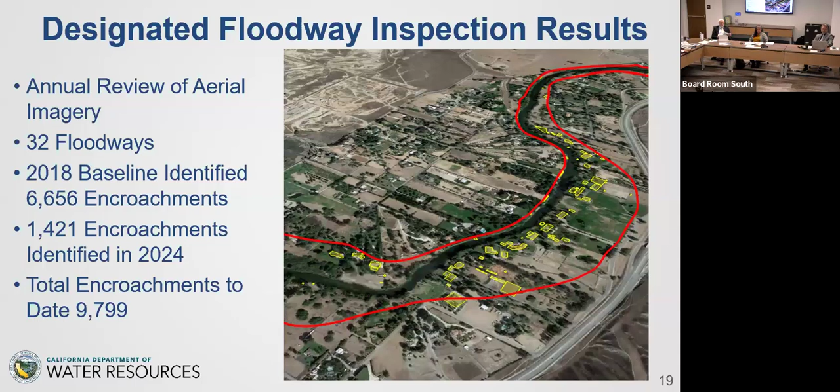If there's any more questions, otherwise I'll hand it over to Mike Tao, who will be talking about the LMA reporting program and the utility crossing inspection program. All right, thank you.

Thank you, sir. Mr. Tao. You look somewhat familiar. I'm back, yeah.

Good afternoon, President Dolan, members of the board. My name is Mike Tao, and I'm the acting manager for the Local Maintaining Agency Assessment unit for DWR. I will provide an update on the LMA reporting program, starting with the background on the program, then cover the results from the 2024 submittals and discuss how that information was compiled and used.

The LMA reporting program was established by Assembly Bill 156 in 2007 and is codified in California Water Code sections 9140 and 9141. It requires annual reporting on operation and maintenance activities for project levees, as well as for certain non-project levees. California Water Code 9140 requires that LMAs report annually to DWR, and 9141 requires that DWR in turn report that information to the Central Valley Flood Protection Board.

The intent is to obtain information beyond what is observed by DWR levee inspectors. We are looking for the LMA's perspective on their levee problems and their priorities for levee maintenance, in addition to information on costs.

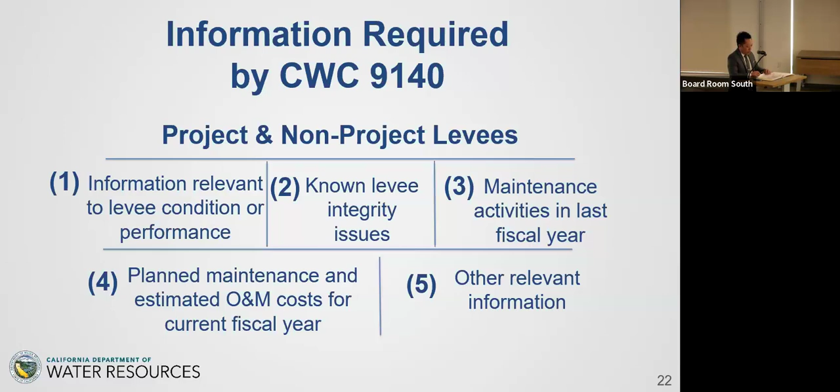In part 2, we ask for known levee integrity issues. Examples are seepage, boils, animal burrows, levee erosion, and cracks. Part 3, we ask for a summary of maintenance activities performed in the previous year along with the costs. In Part 4, we ask for planned maintenance activities for the current fiscal year along with costs. And in Part 5, we ask for other relevant information.

This year, 97% of the 102 geographical levied areas required to report submitted their reports. Every one of them provided a complete report that responded to all 5 parts of the reporting program. The remaining 3 areas simply did not submit a report.

There's one area that consistently does not submit a report because they do not have an LMA, and that is NA6 Eastern Honcut Creek. The other areas that do not submit reports seem to fluctuate from one LMA to another each year. Overall, the number of compliant reports hovers around the high 90% range each year.

As in previous years, vegetation control remains the dominant activity reported by LMAs, followed by rodent control, levee patrol, levee crown maintenance, and levee repair.

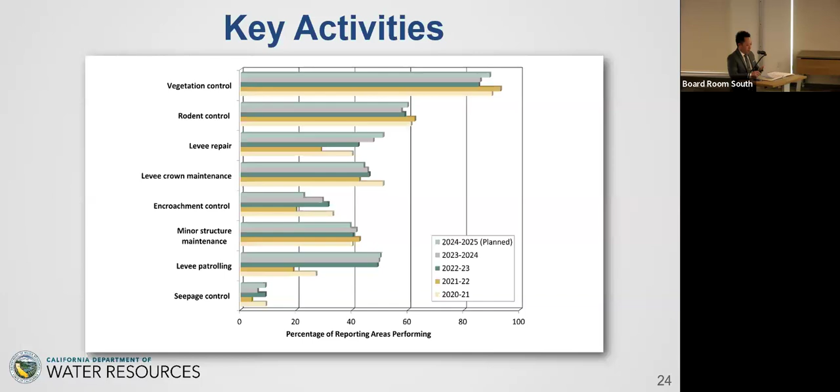This category consists of miscellaneous costs not directly associated with maintenance activities. What's the other? They consist of administration, equipment, engineering, and insurance costs—things not associated with maintenance activities. Some reports even include salaries and whatnot, so all that gets captured in the other category. Not directly related to the actual structures or maintenance activities, but without the people, the insurance, and time to do it, it would be a ghost, I guess.

Okay, thank you. So all the remaining activities listed here appear to be receiving on average less than 10% of the LMA's budget over the last 4 years. Cost per levee mile and other budget information specific to each LMA is provided in the summary profiles in appendices A, B, and C of the annual report.

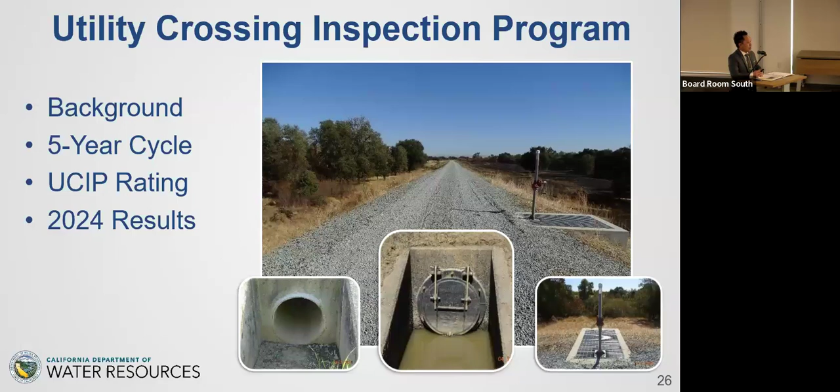The UCIP program was created to identify and inspect all utility crossings penetrating the state plan of flood control in both the Sacramento and San Joaquin River flood control projects. The first phase of the program was a desk study, which began in 2010.

This phase identified and documented utility crossings within the state plan of flood control. The desk study gathered information from O&M manuals, as-builts, levee logs, permits, and other records, and concluded in 2012. At that time, the database contained approximately 7,500 utility records. Of those records, 34% were identified as drainage, 31% as irrigation lines, and the remaining 35% were other types of crossings such as electrical conduits, pressurized gas lines, drinking water lines, sewer lines, and communication conduits.

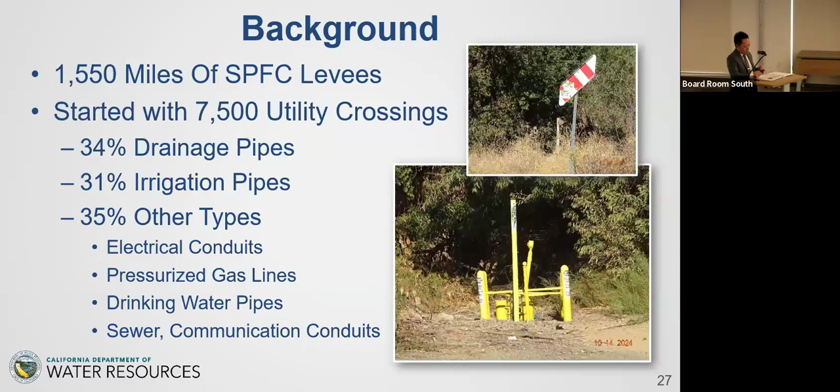After the desk study, UCIP inspectors began the field verification and inspection phase. The inspection phase started in 2012 and took 4 years to complete, concluding in 2015. After completing that first round of inspections, UCIP continued to improve its data, perform targeted inspections, and research additional crossings.

In 2019, UCIP began a continuous effort to inspect all 7,500 crossings on a 5-year cycle. The first cycle of inspections was completed in 2023. Last year, 2024, UCIP began the second 5-year inspection cycle.

When UCIP is not performing inspections, a more detailed review of the inspection record is conducted. This includes adding a detailed description of the crossing, all of its appurtenances, and adding installation dates and referencing documents that acknowledge that the pipe existed, such as board permits, O&M manuals, as-builts, and levee logs. Additionally, new records are created to account for pipes that have been replaced and new pipes that have been installed.

As a result, the total number of records in the database grows each year and currently stands at approximately 8,100 records. Out of those records, some are pipes that have been removed, are considered outside the levee, or bored under the levee, but are kept in the database for historic and tracking purposes.

UCIP uses a slightly different rating system than the levee inspectors, but the ratings are in alignment with each other. UCIP's urgent rating coincides with the levee inspection's unacceptable rating, non-urgent with minimally acceptable, and no action needed with acceptable.

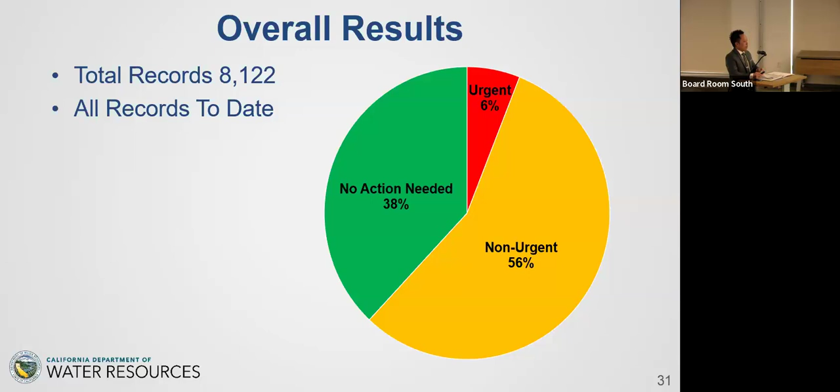As Wei previously mentioned, system feature pipes, also known as LMA responsible pipes, have been included in the LMA's overall rating as of this year. In preparation for this change, LMAs were notified and provided a list of pipes considered LMA responsible. The LMAs were given time to review this information and identify any pipes they felt were not LMA responsible.

USIP then worked with them to either resolve those issues or provide an explanation as to why these pipes are considered LMA responsible. There are impacts to the LMA rating this year as a result of this change: nine LMAs that previously received an acceptable rating saw it change to minimally acceptable because of urgent rated LMA responsible pipes that are now being assessed. Had they addressed those urgent pipe issues, they would have received an acceptable rating.

And this concludes my portion of the presentation. Are there any questions? Thank you for that overview and describing what was in the pages here. Any member comments?

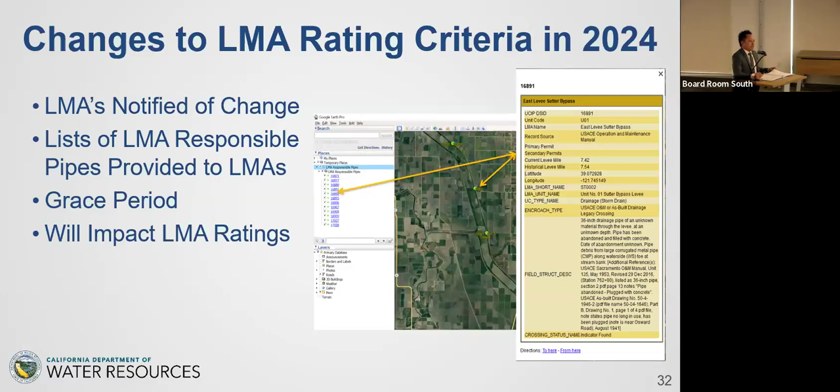Yeah, so most of the gas lines that we don't have information on, we deem those as non-urgent because we don't have inspection records. For those gas lines, if we don't have that information, we deem them non-urgent, and we follow up to see if we can get inspection records to confirm those pipes are not leaking and not busted. That'd be nice. Did I answer your question, Joe?

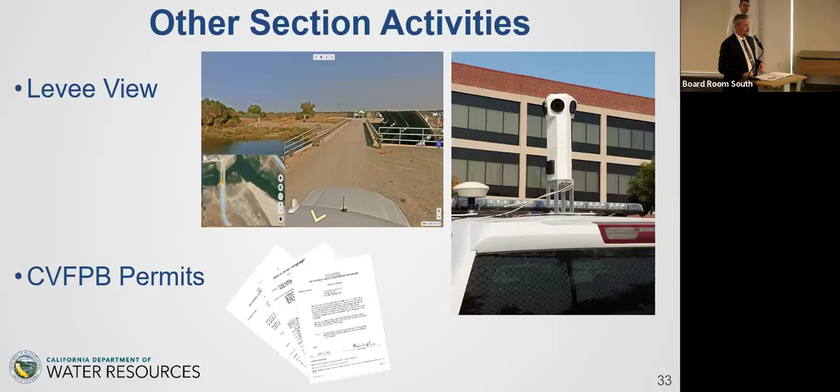We also collaborate with the board's inspection group, as Preston was saying earlier, to provide oversight on permitted construction projects, making sure they're staying in compliance with their board permit.

We're also leading the effort to improve flood fighting skills throughout the state. This year, our inspectors taught flood fight training to 44 different classes to a little more than 1,200 participants throughout the state. In addition, we updated the flood fight methods handbook in both English and Spanish versions.

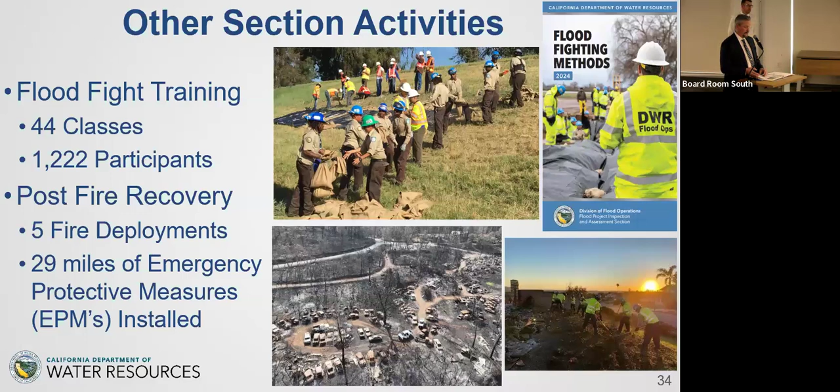During the 2024 fire season, our section staff were activated for nearly 4 months on 5 different fires. They scouted burn sites, managed CCC crews and the installation of about 29 miles of emergency protective measures, erosion and sediment control type measures, to help protect our waterways from contaminants from those burn areas. Our staff are currently deployed to LA for that same purpose.

We also continue to participate in coordination meetings throughout the year with the board, the Corps, and the LMAs, trying to keep communication going and good coordination throughout the year. We're always updating our levee logs as new permits come out and construction is completed, making sure we have encroachments documented and permits shown so that when the Corps goes out to do their inspection, they have the most updated version available.

Something new this year, we began flying our drones to do inspection work, so we're able to get to some sites we normally wouldn't have good, safe access to. That's really helping us do a better job out there. Our flood fight specialists presented at 13 preseason flood coordination meetings, helping to ensure communities throughout the state are ready for that flood season.

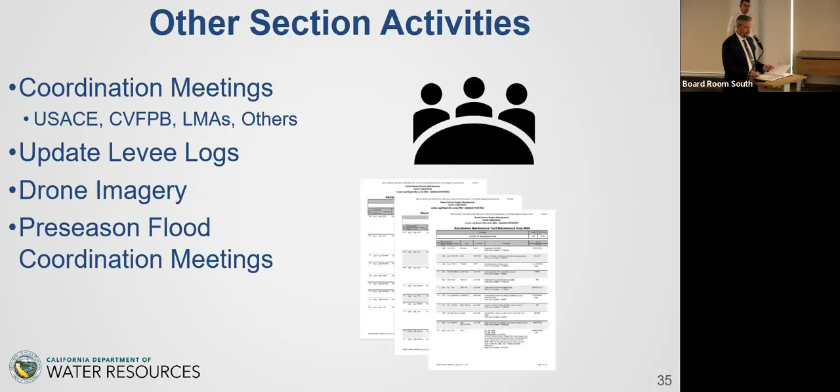So that's what I have for you this afternoon. I want to thank the board for the opportunity and for your attention.

Thank you, that is a lot of work. It's clearly informative. Some of us need paper, I will admit to that, but it's also on the desk. Thanks for summarizing it in the PowerPoint as well. Board members, any more questions or comments? I think there's some items in here we could maybe focus on a workshop. Thank you for the presentation and you and your whole team for all of the work. It is very helpful for us to get a sense of what we're up against, even if sometimes it seems a little daunting. It's good to know, and if we don't know, we can't make the case to do something about it, right? Thank you, Member Johnson.

Thank you. Anyone in the audience brave enough to get up now? Any hands raised? Wow, thank you Mr. Wiley. Good luck, Mr. York, glad that you're down there helping other folks in Southern California. Mr. Tao, always good to see you. Come by anytime, you're a good guy. Thank you.